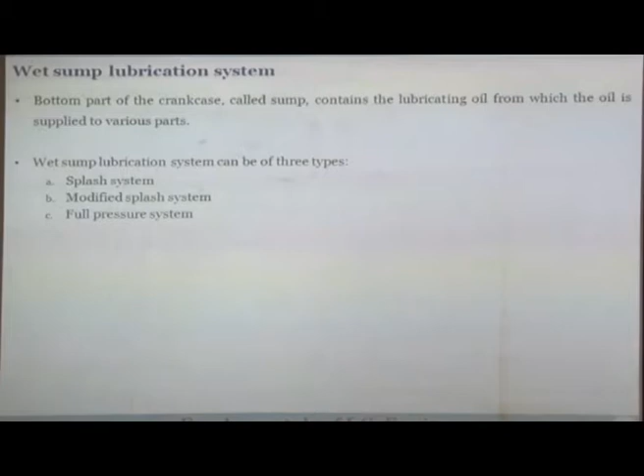This is one of the most popular systems, particularly for cars, buses, and trucks. This is the wet sump system, which is very popular. One type is called the splash lubrication system.

So here you see this is the camshaft, this is the connecting rod. On one side this is the crankshaft, and this is the connecting rod, and here you have the piston. There will be another set of connecting rod and piston at two other places. Only one piston is shown here.

So here you have the sump, the bottom part of the crankcase, which is filled with lubricating oil. There will be a strainer. What is its function? One of the important functions of lubricating oil is to remove whatever debris or soot is generated, cleaning it up and depositing it here.

If you have debris here, you do not want it recirculated, because once recirculated, it will come between the interface of mating surfaces. A small wear debris between two mating surfaces will increase the wear. So this is extremely challenging - you remove the debris so only clean oil goes through, and this is the oil pump.

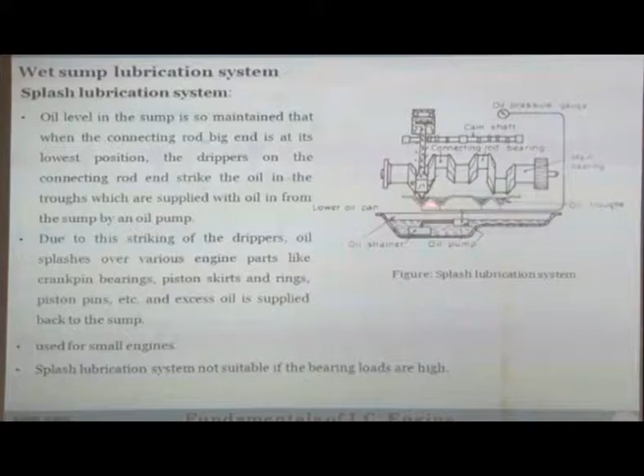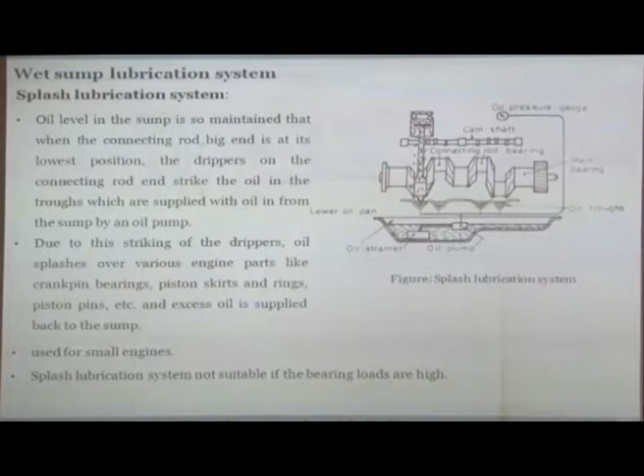It creates the pressure, and then there is an oil trough. The oil trough is like a small tank which is just below the crankshaft. If you look at this connecting rod, below it there is some kind of geometry.

It's like a finger. So when the crankshaft comes, this dips into the trough and throws the oil up onto the liner walls, and that's how lubrication happens. The oil level in the sump is maintained so that when the connecting rod big end - this is the big end, this is the small end of the connecting rod -

when the connecting rod big end is at its lowest position, the dipper in the connecting rod end strikes the oil in the trough, which is supplied with oil from the sump. This pump is supplying all these troughs, so they are always full since they're fed by the pump, and when the dipper comes, it splashes and lubricates the walls.

Once it splashes, the oil is removed from the trough and made up again by the pump. Due to the striking of the dipper, oil splashes over various engine parts such as crank pin bearings, piston skirt, rings, piston pins, etc., and the excess oil is supplied back to the sump. It lubricates everything, and whatever is excess drips back to the sump. It's a very dynamic situation.

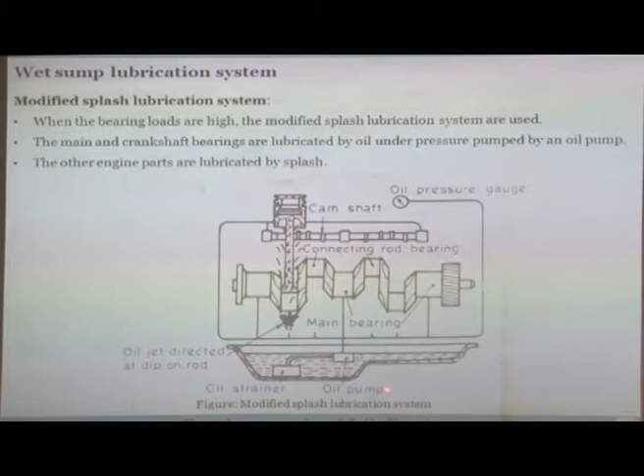Then the third system is the full pressure lubrication system. What is this full pressure lubrication system? In this, an oil pump is used to lubricate all parts of the engine. Here it is only the bearings, but here the oil pump is lubricating all the parts.

Drilled passages are used to lubricate connecting rod bearings. So now you have drilled passages. Oil is coming here, and from there a drilled passage is lubricating the connecting rod big end bearing. From here there is another passage, and then through the connecting rod there is a passage which is lubricating here. All these bearings are lubricated by passages.

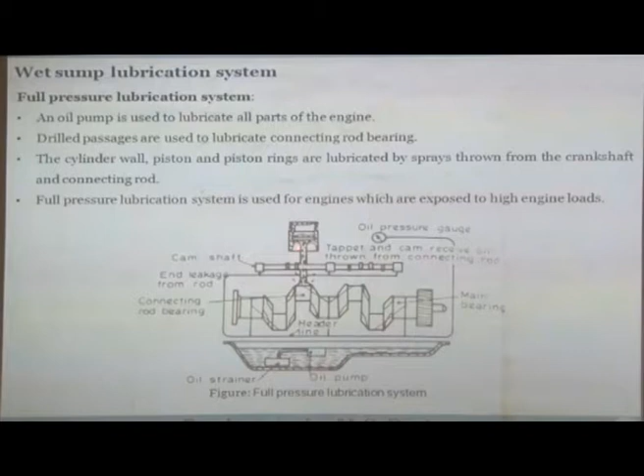So basically in various components you have drilled very fine holes which carry high pressure oil under dynamic conditions to various parts. The cylinder wall, piston and piston rings are lubricated by spray thrown from the crankshaft and connecting rod. So in the crankshaft and connecting rod there are various holes which throw the spray up.

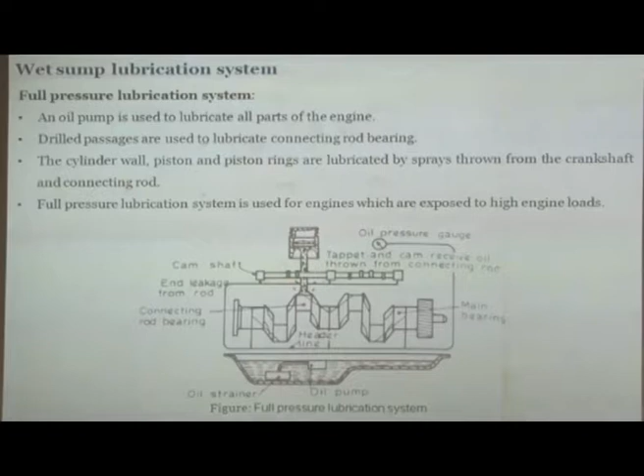Full pressure lubrication system is used for engines which are exposed to high engine loads. So all the high performance engines which experience very high loads, which are expected to operate at high loads most of the time, they use a full lubrication system. Most of the automotive engines actually use this kind of system.

So this is as far as the lubrication systems are concerned.

Functions of the lubricating system. What does a lubricating oil system do? It does a few things. So one of the first responsibilities of the lubrication oil system is to lubricate.

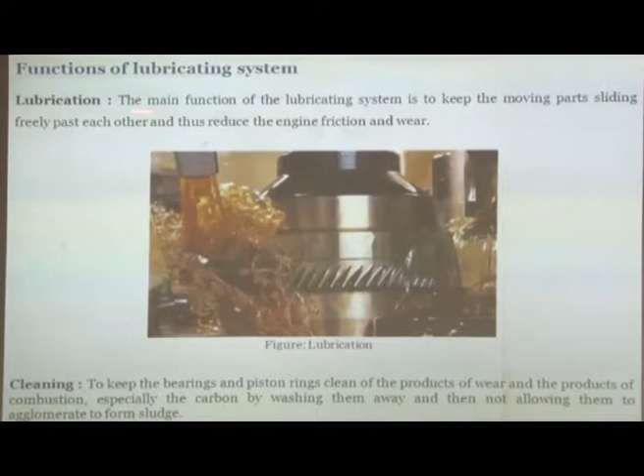But lubricate is not the only duty that it has to perform. Lubricate is one of the main duties, but it is not the only one. There are others. So the main function of the lubricating system is to keep all the moving parts sliding freely past each other with low friction and reduce engine friction and wear. So the first function of the lubrication system is to lubricate effectively.

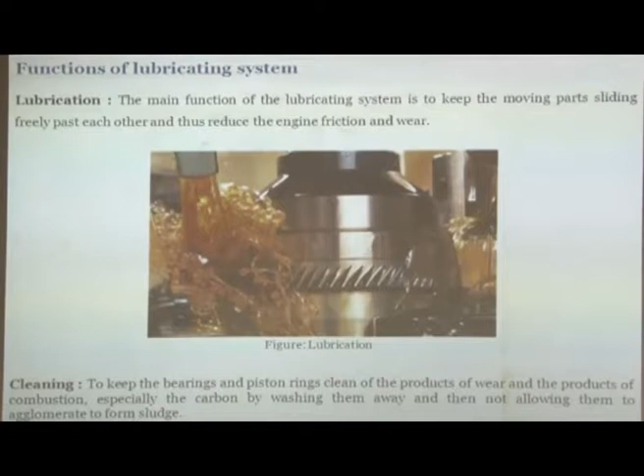The second function of the lubricating oil system is to clean. Because the engine has combustion, and in the combustion process you generate a lot of soot, deposits, and lacquers and all kinds of things which, if you don't clean, will build up. So one of the important functions of the lubricating oil is to remove those deposits, because deposits on any surface are undesirable. For example, if there is a surface used for heat exchange and you have deposits on it, what will happen? It will reduce the heat transfer, and the device will not work effectively.

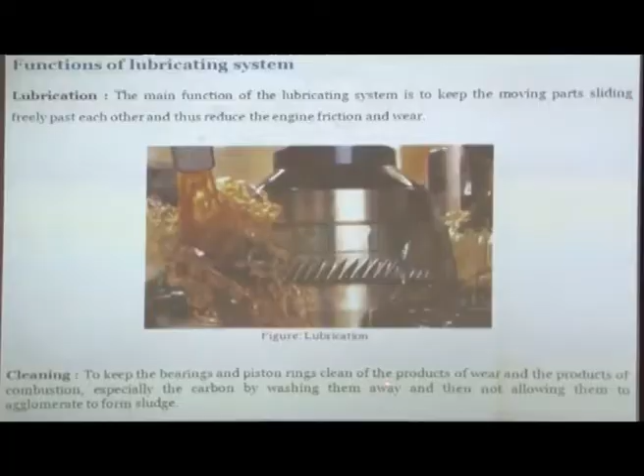So to keep the bearings and piston rings clean of the products of wear and the products of combustion, especially carbon, by washing them away and not allowing them to agglomerate to form sludge. So one of the functions is to remove them.

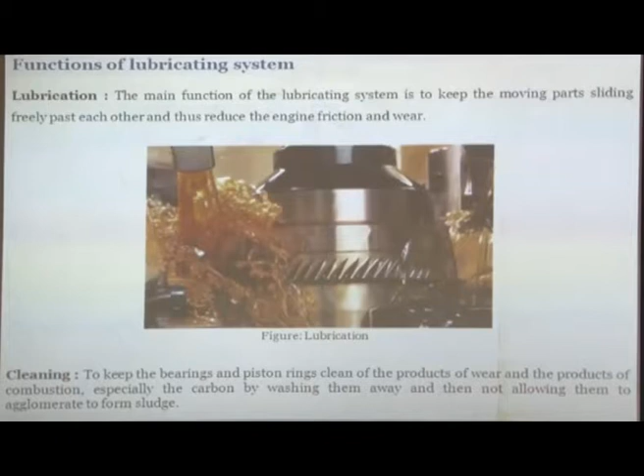For example, you must have seen the piston ring. Where is it located? In the groove, and there is not much space in the groove. There is mobility, and you want that mobility in order to have a dynamic seal. If deposit takes place and that groove becomes smaller, what will happen? Your piston ring will get stuck in the groove. It will lose its mobility, and if it loses its mobility, it will not be able to seal properly. So the bottom chamber will not be sealed against the top chamber. As a result, the blow-by will increase. Then a lot of wrong things will start happening.

So one important function is that you remove the deposits wherever they are forming. But then another important function is that all those deposits, when they come to the crankcase, should not agglomerate and form groups, because if they agglomerate and form groups, they will form clusters, and clusters are not good. So they should remain suspended in peptized form.

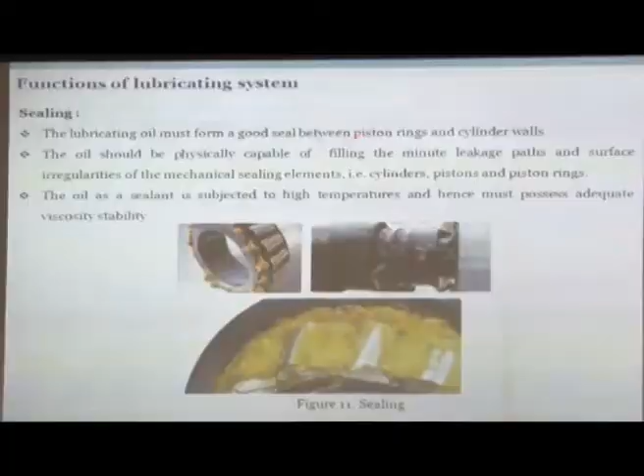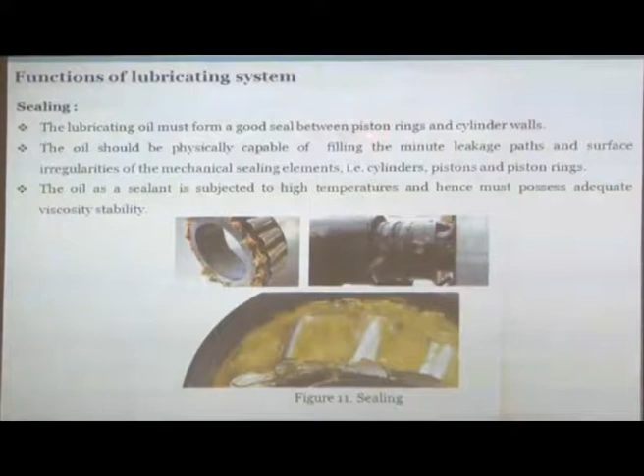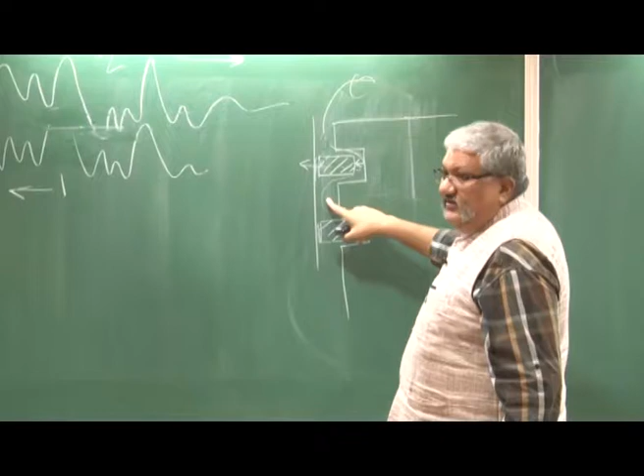Another very important function is sealing. Lubricant oil must form a good seal between the piston ring and the cylinder wall. The cylinder surface and the piston ring surface both have minute irregularities. If you have to prevent gas pressure from leaking from one chamber to the other, this gap has to be filled, and it is filled by lubricating oil. So it seals and prevents the leakage of pressure from the top chamber to the bottom chamber. This is one of the very important aspects of lubricating oil, which should be able to form a good seal between the piston rings and the cylinder wall.

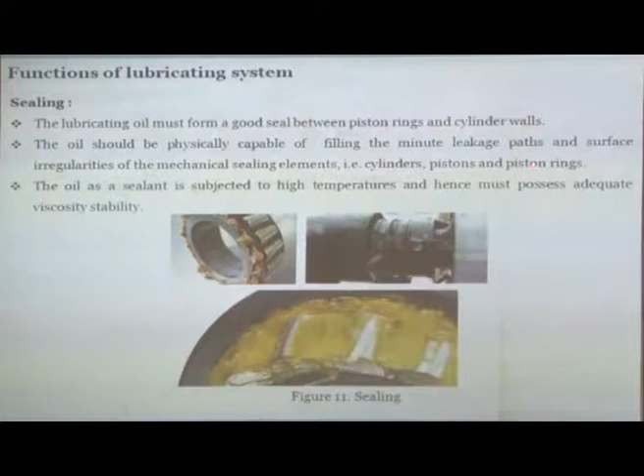The oil should be physically capable of filling the minute leakage paths and surface irregularities of the mechanical sealing components such as cylinders, pistons and piston rings.

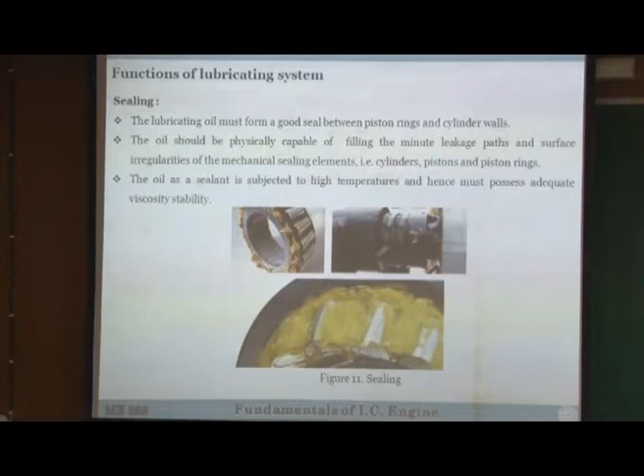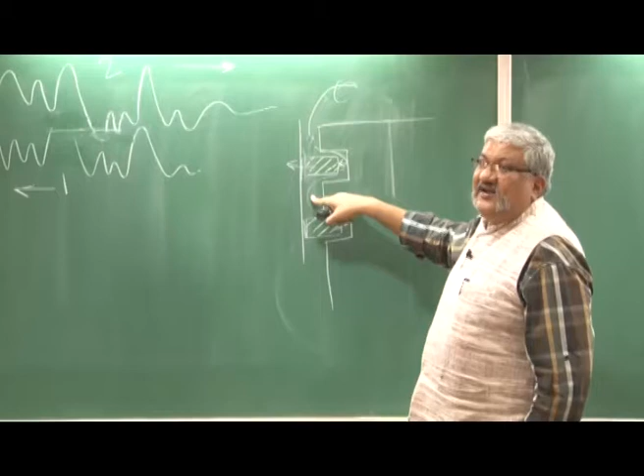The oil used as a sealant is subject to high temperatures, so it must possess adequate viscosity stability even under high temperature conditions. Now here comes a twist, because any oil, when heated, will lose viscosity. But for this sealing function to be performed, the oil must protect against leakage even in high temperature conditions, which means it must maintain its viscosity even at high temperature. This is counterproductive or counterintuitive — an oil that naturally loses viscosity with increased temperature is now expected to maintain its viscosity even as temperature rises.

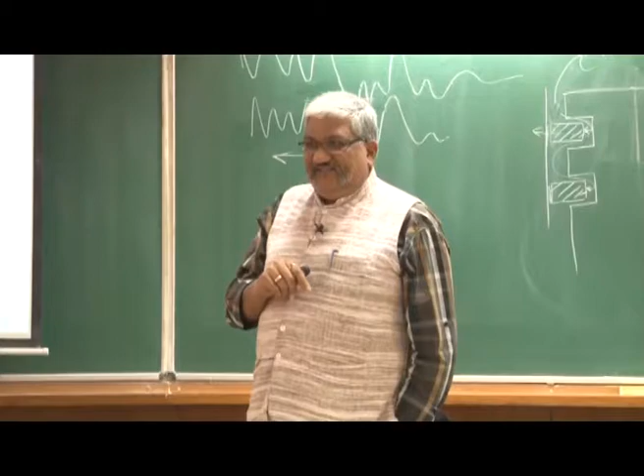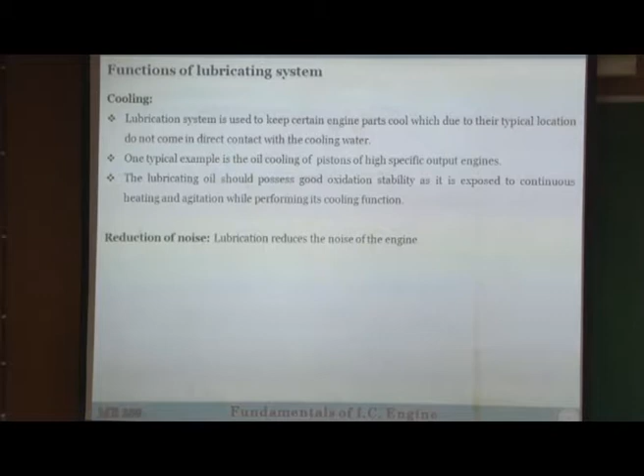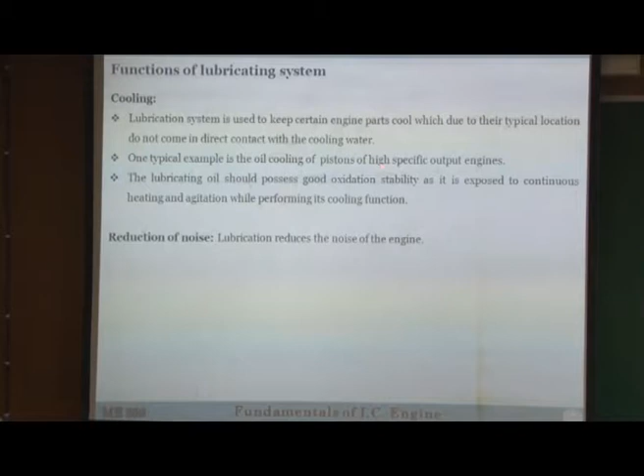Believe it or not, lubricating oil is also used for cooling. In high performance engines, the piston becomes one of the weakest parts which need to be cooled, and you cannot have water jackets or air cooling there. The only fluid you can use for cooling the piston is lubricating oil. So the lubrication system keeps certain engine parts cool which, due to their typical location, do not come in direct contact with cooling water. One typical example is oil cooling of the piston in high specific output engines.

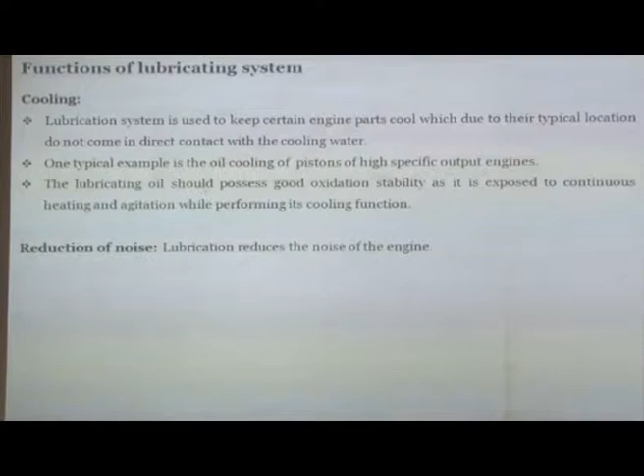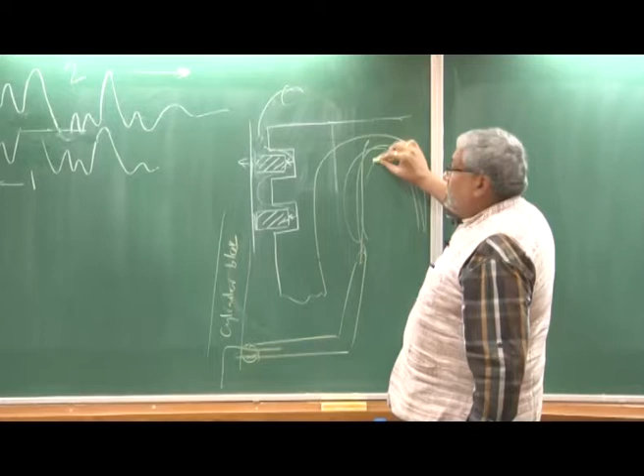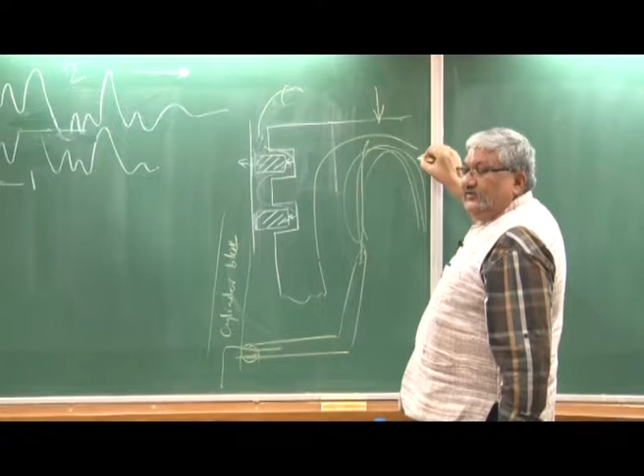So suppose this is the piston, and this is the cylinder block. On the cylinder block, through some mechanism, there is an oil gallery, and from that gallery high pressure oil comes through a nozzle. This nozzle sprays oil all over the internal surface of the piston to cool it, so the heat convected from the gases to the piston and conducted through it is convected back into the lubricating oil. This oil then goes to an oil cooler where it is finally transferred to the cooling water.

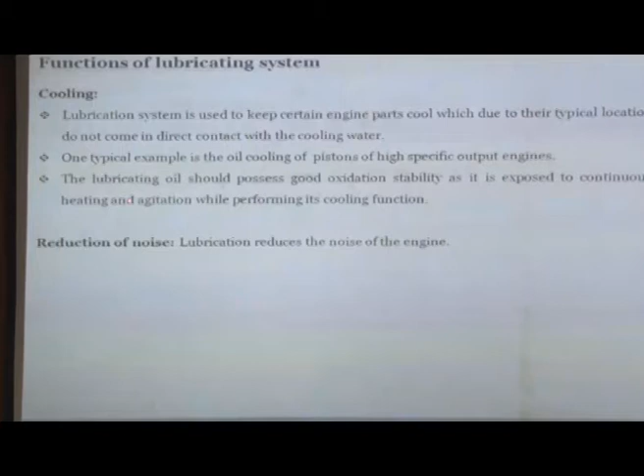So the lubricating oil should possess good oxidation stability as it is exposed to continuous heating and agitation while performing its cooling function. Another function is reduction of noise — lubricating oil should also reduce noise a little bit.

So these are some of the very, very demanding expectations from lubricating oil. Now let us try to understand what lubricating oil is and how we make it.

Recall that during refining of petroleum products, there is a fractional distillation column, where first a lot of lighter products come out, then petrol, diesel, and finally lubricating oil. Lubricating oil basically contains two things: the base stock, which comes out of the refining process, and additives, which are mixed in to make the final lubricating oil. Base stock is typically 70-80%, sometimes 90-95%, of the lubricating oil, while additives make up the remaining 5% to 20-30%, depending on the application.

Base stock is basically the main bulk of the material that acts as a lubricant. Now base stock does not have all the properties that you expect from a lubricating oil. We have listed a whole lot of expectations - it should be able to clean the surfaces, keep all the deposits peptized, and you should have good cooling efficiency. All those things, it should be stable for a very long time.

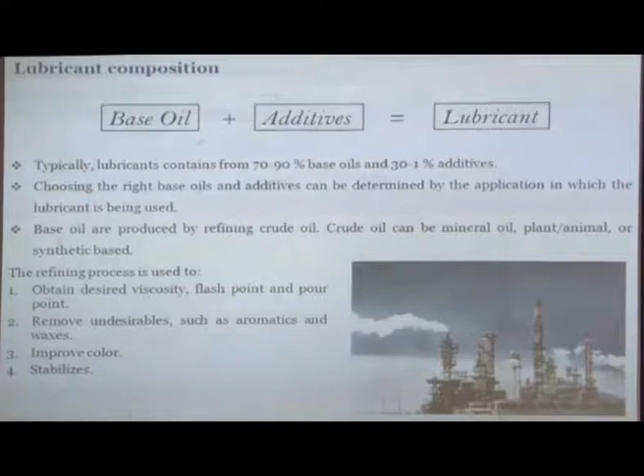So depending on the application, you want a certain type of properties. That's where you take a base stock of the desired properties and put certain other types of additives into it to have your desired properties for that particular application. So choosing the right base oil and additives can be determined by application, and it varies from application to application.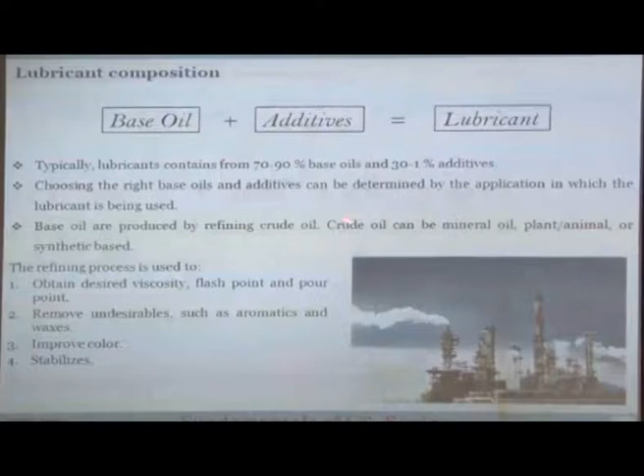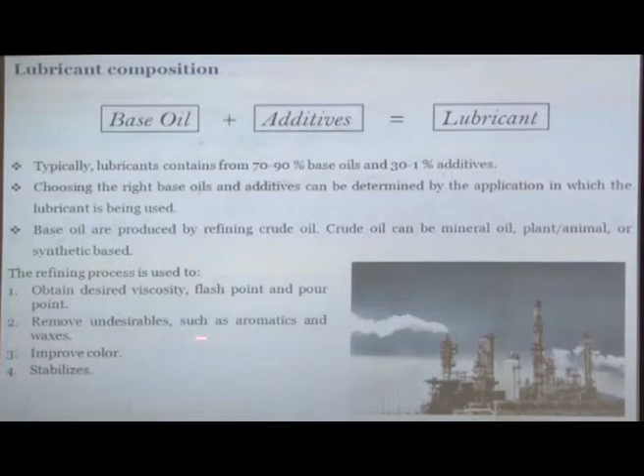Base oils are produced by refining of the crude oil. Crude oil can be mineral type, crude oil could be plant or animal based, or synthetic based. In the refining process, you obtain the desired viscosity, flash point and pour point of your base stock. You remove the undesirable products such as waxes and aromatics, you improve the color, and you stabilize.

Stabilizers means, if there are any double bonds or triple bonds present, then the oil will be unstable, because double and triple bonds means there is an appetite for hydrogen. Those bonds will break quickly and join with another hydrocarbon which is also having appetite, forming larger molecules, and when you have larger molecules, you will change your properties - your viscosity will increase. So you stabilize them by removing the unsaturation.

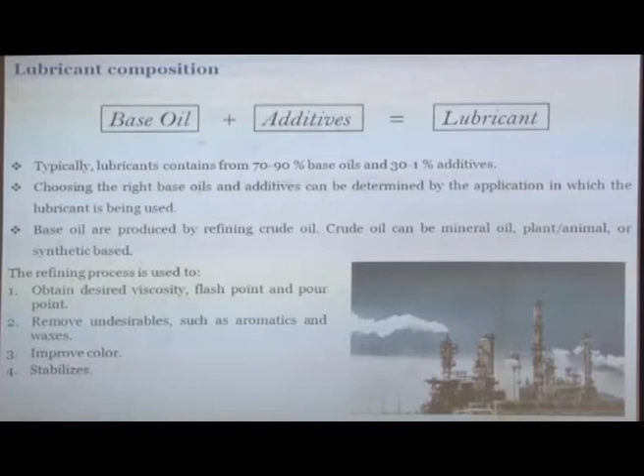Now if you look at the other properties, viscosity, as I said, is one of the most important properties. Viscosity of an oil is a measure of its resistance to flow, and it is usually measured in terms of - there are many units, but this is Saybolt Universal Seconds, SUS, which is the time required in seconds for a given quantity of oil to flow through a capillary tube under a specified condition. So there is a capillary tube, and you take a certain quantity, and whatever time it takes for flowing through that capillary, that will be used for calculating the Saybolt Universal Second.

Viscosity is normally expressed at two temperatures, minus 18 degrees C and 99 degrees C. Generally for fuel purposes, we say 40 degree and 100 degree is what is more accepted, but then you can choose your own temperature and compare.

Viscosity is also expressed as centi-Stokes, centipoise, redwood second. So there are many scales depending on the type of apparatus you have and the procedure that you are following for the determination of the viscosity. Centi-Stokes is a unit of kinematic viscosity, while centipoise is for absolute viscosity as determined by cold cranking simulator. Anyway, that is not very important.

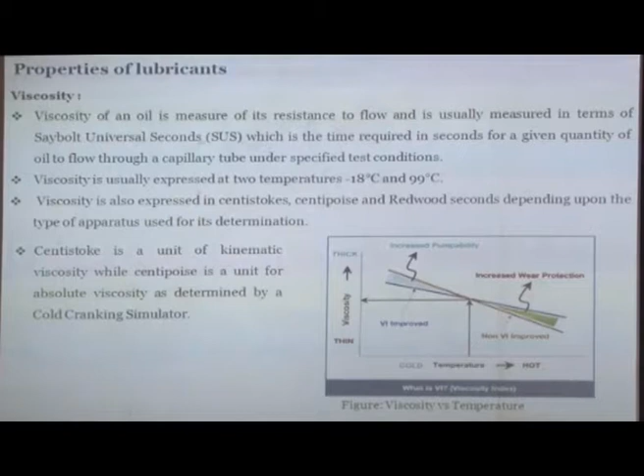You basically put some chemicals, additives into the oil which are called viscosity index improvers. Simply put, these are molecules which are temperature sensitive, so their physical size, when you heat them, increases. Imagine a spring which is closed, and when you heat it, it expands. So expands means the viscosity will increase.

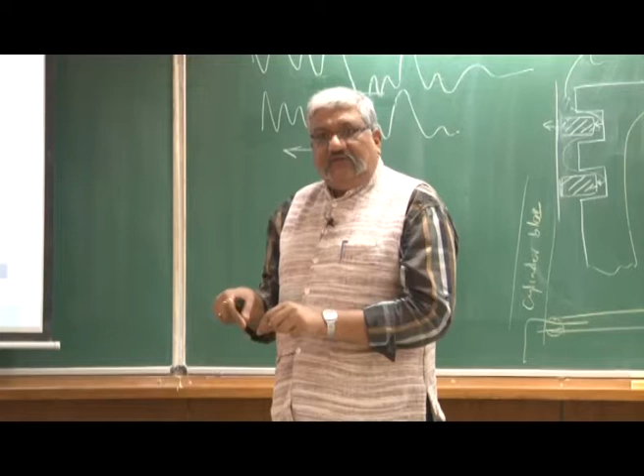So you have base oil where the viscosity is going down, and you have additive added to it which increases its viscosity. So the overall effect of increase in temperature will now be lower reduction in viscosity. If you don't put anything, then this is the line, and if you have put VI, viscosity index improver, the viscosity will not reduce by a great degree. So this is the VI improved.

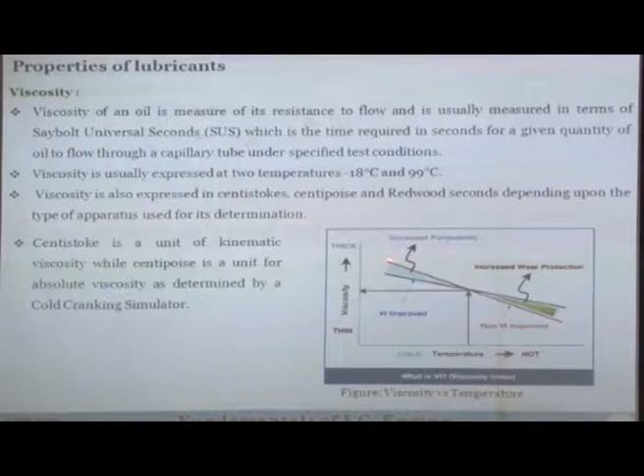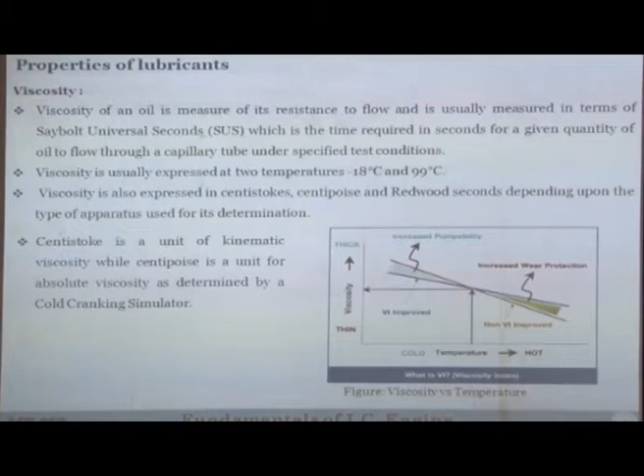Now here you see this is increased pumpability. That means if you are putting viscosity index improver, the pumping losses will reduce because initially your viscosity has come down, and here the wear protection will be more by putting the viscosity index improver. So both in low temperature range and high temperature range, by putting viscosity index improvers you will get benefited.

So viscosity index: the viscosity of an oil is substantially affected by its temperature. Higher the temperature, lower will be the viscosity. The variation in viscosity of an oil with change in temperature is measured by the viscosity index. A high viscosity index number indicates relatively smaller changes in viscosity when the temperature goes up, and vice versa. To improve the viscosity index of an oil, certain compounds called VI improver or viscosity index improver are added to the base stock.

So this is all about the viscosity index. Now, cloud point and pour point. What is cloud point? Cloud point temperature refers to the temperature below which the wax in the lubricating oil forms a cloudy appearance. Lubricating oil is a mixture of several hydrocarbons, so when you start reducing the temperature, at a certain point some of those heavier hydrocarbons will start crystallizing and forming wax. That temperature is called cloud point.

When the clouding of the fluid changes from crystal clear to cloudy, that's when the wax formation takes place. The presence of semi-solidified waxes thickens the oil and clogs the fuel filter - this is not applicable to injectors in the engine, this is for diesel. So basically it is going to thicken the oil.

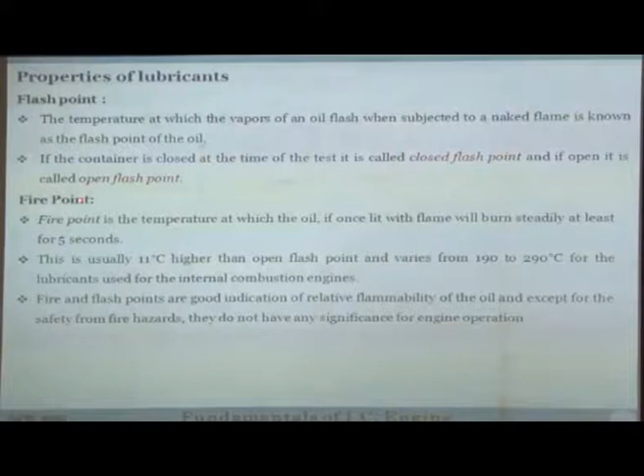These are different ways of measuring the flash point temperature. Flash point is when you show the flame and it will just flash once and get extinguished. If it has continuous flames, that's called fire point because it has caught fire. The fire point is the temperature at which the oil, if once lit by flames, will burn steadily for at least 5 seconds.

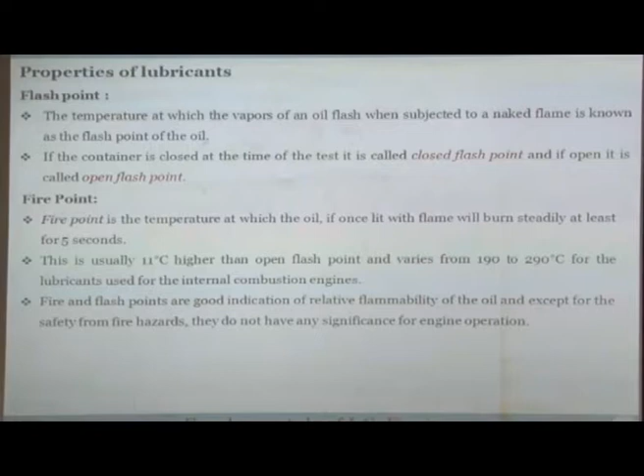This is usually about 11 degrees higher than the open flash point and varies from 190 to 290 degrees centigrade for lubricating oils used in IC engines. Under no conditions should your oil reach this temperature, because if that happens, the whole engine will get inflamed.

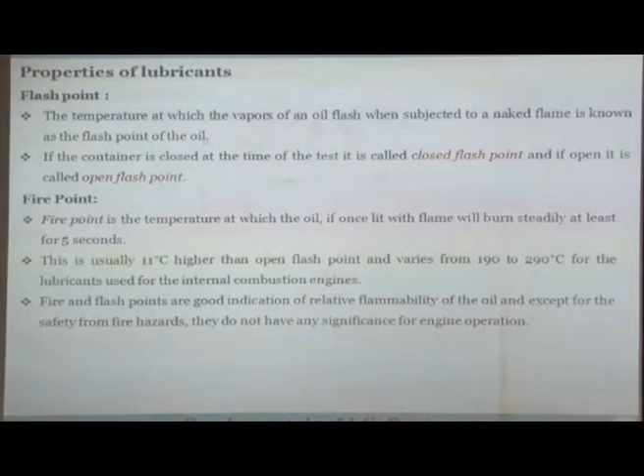Fire and flash points are good indicators of relative flammability of the lubricating oil, and except for safety from hazard, they do not have any other significance for engine operation. So fire and flash points are more safety parameters, and pour and cloud points are more from the cold climate working condition point of view.

They are important. Specific gravity of the oil varies from 0.85 to 0.96. This is not very important except as an indicator of weight and volume, so it's not really very important.

Carbon residue is the quantity of known mass sample of the oil which, on evaporation under specific conditions, remains carbonaceous. So you burn a certain quantity and whatever is left as a cake, that's the carbon residue.

Oiliness is a property of the oil to cling on the metal surface. In wintertime, you take oil, rub it on your skin, and figure out how good the oil is by how smooth your skin becomes. That's the oiliness of the oil. If the oiliness is good, it will stick to your skin and provide smoothness. The same applies to the engine.

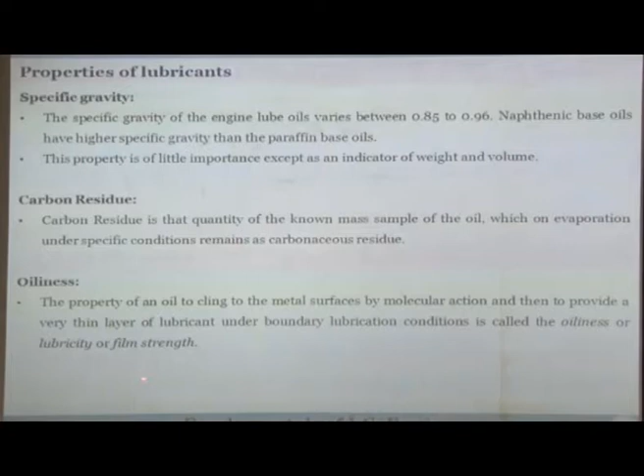The property of the oil to cling on the metal surface by molecular action and provide a very thin layer of lubrication under boundary lubrication conditions is called oiliness, or lubricity, or film strength. This should form a very thin layer and reduce friction.

Oxidation stability is also important. What is oxidation stability? Resistance to oxidation. Why is it important? Due to oxidation, oil will form deposits on the piston ring and lose its lubrication properties. So you should always have good oxidation stability.

The products of oxidation include carbon, lacquer, sludge, and organic acid, which can be corrosive to certain metals. You must have seen that whenever you open the engine, there is always a yellow kind of layer present on all the components exposed to lubricating oil. That is because of the oxidation of the lubricating oil.

Cleanliness, the absence of water and sediments, is an essential requirement of an oil. Water is not a lubricating fluid, it promotes corrosion, while dirt and small foreign particles of insoluble matter can cause great wear of the engine parts, and you don't want to have them.

Color has no practical significance except as an indication of how good or bad the oil is. If the color is dark, that means a lot of soot has gone in. If the color is light, that means it's still good, it doesn't have soot loading.

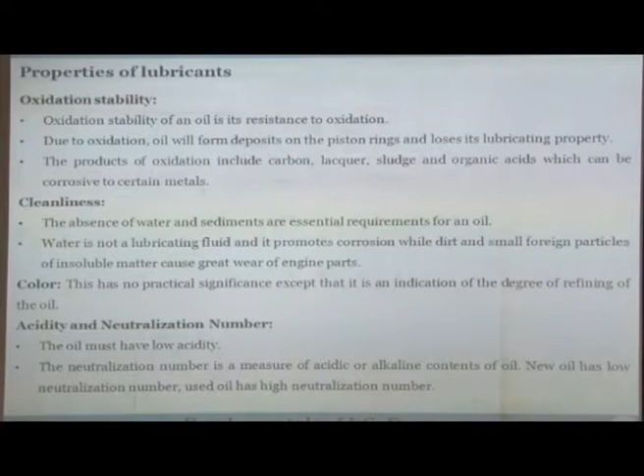Acidity and neutralization number: the oil must be basic, it should have low acidity. If it is exposed to more combustion gases, which are mostly acidic in nature, it should be basic in nature in order to protect the components. If it becomes more acidic, the components will wear out faster. The neutralization number is a measure of acid or alkaline content of the oil. New oil has a low neutralization number and used oil has a high neutralization number.

The lubricating oils are classified as per SAE. You must have seen SAE 10W40, 20W40 - this is just the classification of the oil, a method of assigning a number to different oils in universal use. So 10W40 oil in India and 10W40 oil in the US will have similar properties. They may be from different companies, but they have to meet a certain property table.

SAE assigns a number to the oil whose viscosity at a given temperature falls in a certain range. There are two temperatures used as reference, -18 and 99 degrees C. 5W, 10W, 20W - these three numbers are defined for viscosity at -18. -18 means they will be good at low temperatures.

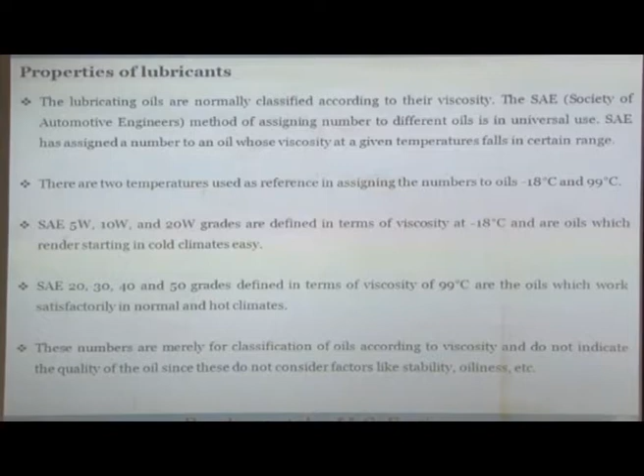These oils render starting possible in cold climatic conditions. So 5W, 10W and 20W are basically cold climate suitable lubricating oils. If it is SAE 20, 30, 40, 50 grades, there the viscosity is measured at 99 degrees, so they are not for cold climate conditions, they are for normal or hot environmental conditions. Whenever you see oil with a certain grade, you should be able to tell whether it is for cold climate, normal, or hot conditions. These numbers are merely used for classification of oil according to viscosity and do not indicate the quality of oil, since they do not consider factors like stability, oiliness, etc.

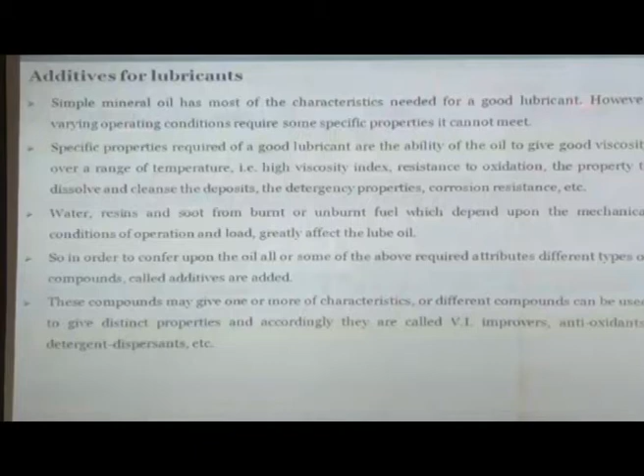Additives. Simple mineral oil has most of the characteristics needed for a good lubricant. However, under varying operating conditions, they require certain specific requirements which cannot be met by the base oil. For example, you want good viscosity over a wide range of temperature, high viscosity index, resistance to oil oxidation, property to dissolve and clean the deposit, detergency properties, corrosion resistance. All these properties do not exist in the base oil and they have to be given. So how are they given? They are given by additives that are added to it.

Water, resins and soot from burnt and unburnt fuel, which depends on the mechanical condition of operation and load, greatly affect the lubricating oil. When they get into the lubricating oil, they deteriorate its properties. So you want to put additives which can fight these as well. In order to confer upon the oil all or some of these attributes, different types of compounds are added which are called additives. These compounds may give one or more characteristics, or different compounds can be used for distinct properties, such as viscosity index improvers, antioxidants, detergents, dispersants. These are some of the additive names added to the lubricating oil base stock to give desired properties.

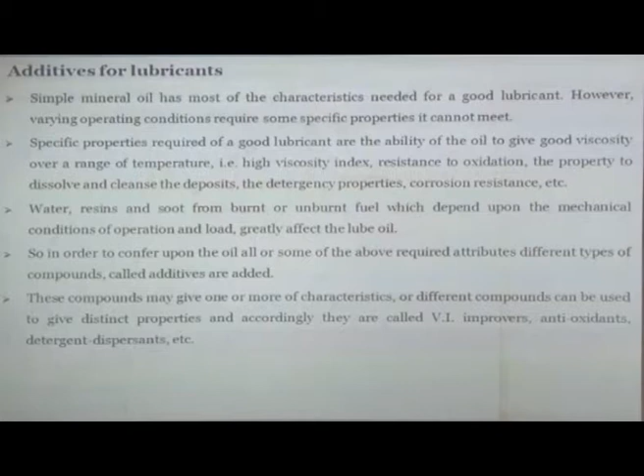This table basically lists all the additives. Detergents control high temperature deposits; if overbased, they can act as an effective acid neutralizer, so if acids are formed, they can fight the acids. Dispersants are used for control of low temperature sludge and varnish deposits. Anti-wear is for reducing wear, galling and seizure. Anti-rust reduces rust on different components by forming a protective layer. Viscosity index improver reduces the sensitivity of oil viscosity to temperature, maintaining viscosity even as temperature rises. Pour point depressant is used for reducing wax crystallization. Anti-foam agents are very important.

If something foams, what does that mean? It means all those bubbles will have a lot of oxygen, so all the fluid is now exposed to more oxygen, so oxidation will become more. So an anti-foam agent is nothing but a chemical which reduces the surface tension, so even if there is oxygen trapped, it will not form bubbles. The bubble will be collapsed because the surface tension is less.

Similarly, antioxidant reduces oil oxidation and protects alloys and bearings against corrosive attack. Oil contamination and sludge formation occur if you keep using the lubricating oil; they become unstable for further use because there will be a lot of oxidation products and sludge in it. Contamination of the lubricating oil occurs because of oxidation, dilution of the lubricating oil by fuel, by water vapor, formation of carbon, lead based compounds, wear metals may get added to it, and atmospheric dust and dirt can enter the system. All these contaminants, when mixed with oil, contribute to formation of sludge in an engine. This sludge can be black, brown or gray, it can be of any color.

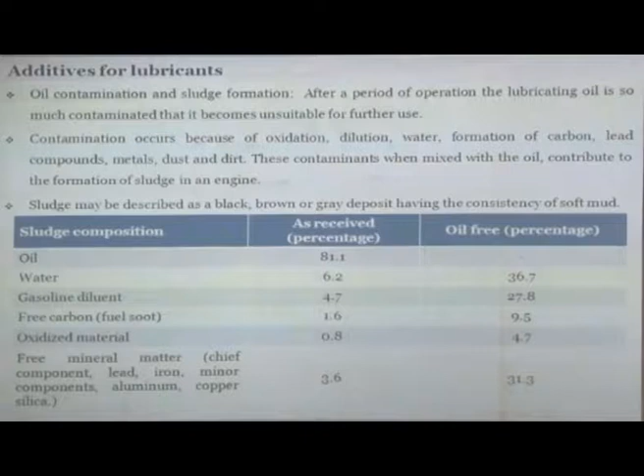This is a very complex subject, and this is one area which is still active, with a lot of research going on related to engine tribology and development of different types of high performance lubricating oil.

Nowadays the automotive industry is undergoing transformation. We expect a lot of power to be produced by a small size engine, which means thermal loading of the engine is increasing. More and more every component is exposed to higher and higher temperature, and in those conditions, maintaining good lubrication becomes extremely challenging.

First of all, let us understand why we require testing an engine. We require it so that we can have a device which is optimally designed, performs optimally, meets all the emission regulations, and its cost is still manageable - so to reduce the cost.

One of the other objectives is to improve the performance. You want to extract more and more power from a smaller and smaller engine. So how do you know how much power you are able to extract? That you can figure out only by testing the engine.

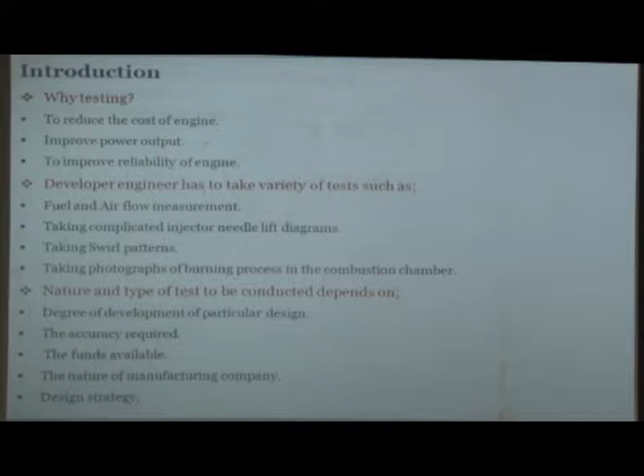When you test the engine, you also want it to not produce power just once, but keep on doing so for a fairly long period of life - so durability also needs to be tested. There are many types of testing.

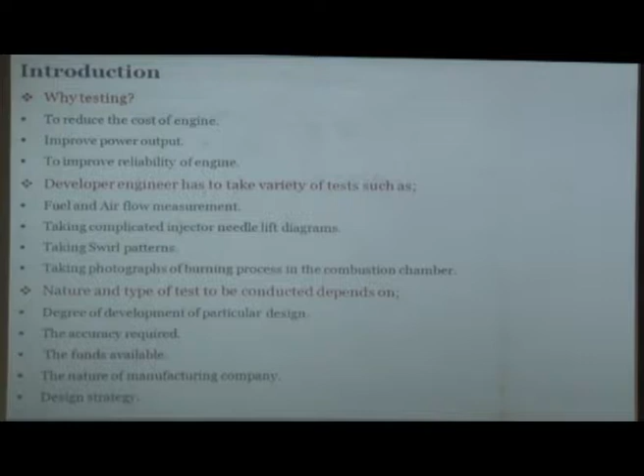For example, you might test the engine for performance, and that's a very small test. You might like to test the engine for emissions, that also is not a very long test. But when you are testing an engine for durability, you have to do an accelerated test for a prolonged period of time to see which components start failing first. So there are different types of testing with different requirements and different time frames.

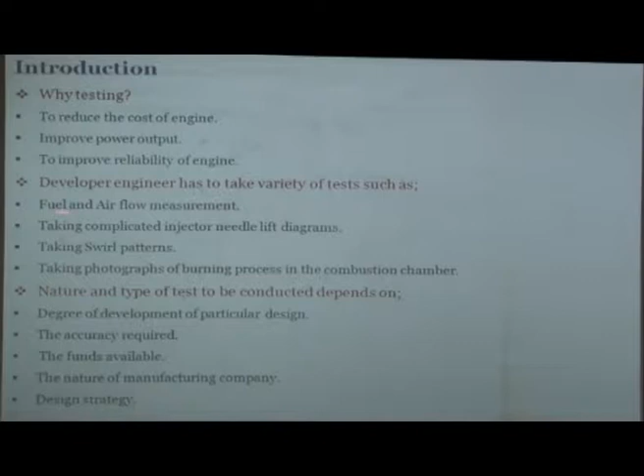The development engineer has to perform a variety of tests. For example, one of the foremost important tests is figuring out what is the specific fuel consumption and what is the air consumption. So one of the basic tests on the engine is fuel and airflow measurement, which we'll be discussing.

Then taking complicated needle lift diagrams - when the injector opens and closes, what should be the duration, what should be the rate of fuel injection in the combustion chamber. The designer is also interested in taking into account the swirl effects.

We have seen that in an engine, the fuel and air mix, and the air could have different types of motion inside the combustion chamber, because the air motion is largely responsible for the interaction of fuel with air, and in that way it affects the power output as well as the emissions generated from the engine. So you are also interested in looking at swirl, which requires optical technology - endoscopic technology or a complete optical engine where you can see the entire combustion chamber.

This is the frontier of combustion research, where you are interested in taking pictures of fast burning images or flames inside the combustion chamber, because you want to figure out which are the locations where soot is forming, which are the locations where air is not being utilized, and which are the locations where your fuel is not penetrating so you are not able to optimally utilize the air inside the combustion chamber.

Ultimately, whatever is happening in the engine - these first two methods are more on a metal engine where you just guess things, and the last two are more on the optical side where you are actually interested in visual evidence. For most development done in the industry, it's done using these first two points, and if you look at very detailed study of what is happening inside the combustion chamber, this is done using optical engines.

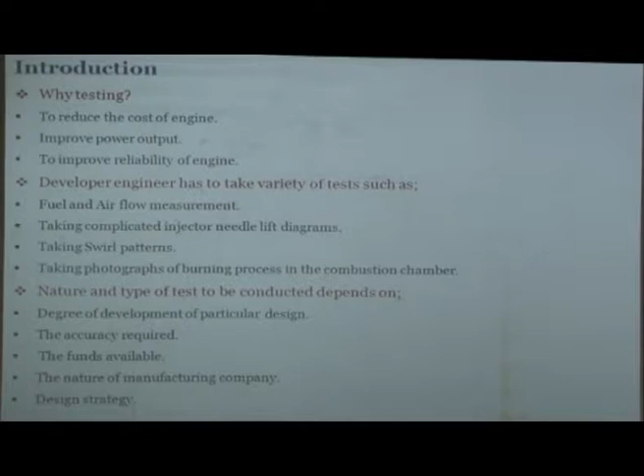And what is the accuracy that you require? For example, if you are having an engine test bed in an R&D center, there you require extremely high accuracy. But if you have an engine setup at the end of the assembly line where you just have to pass or fail the engine, there you don't need that kind of high accuracy. So depending on what accuracy is required and where it is going to be used, the accuracy required will be decided.

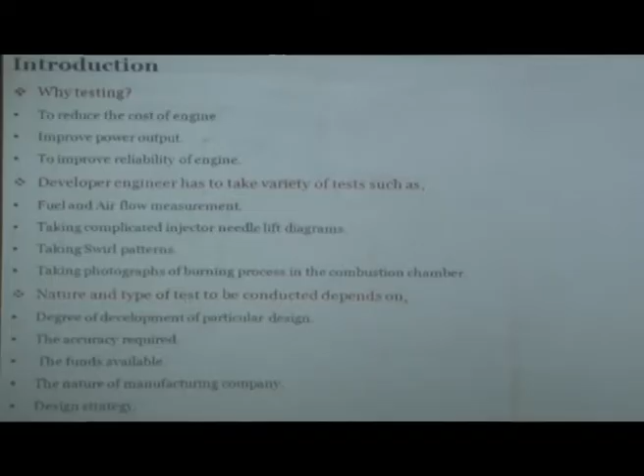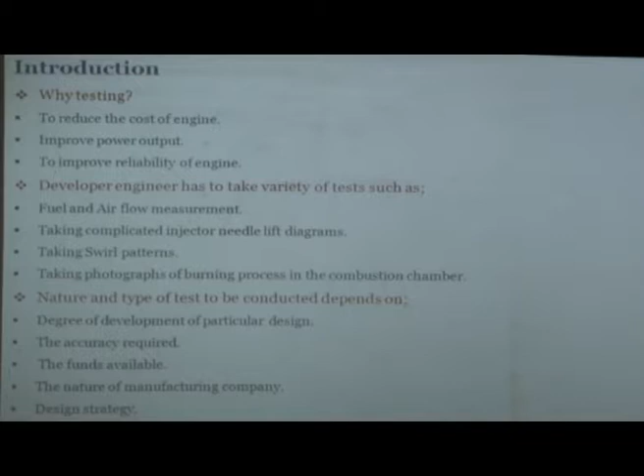And obviously, as you try to put in more and more accurate experimental facilities or infrastructure, it becomes more and more money intensive and expensive as well. Everything is governed by how much money is available, how much funds are available, and what is the nature of the manufacturing company. Whether you are interested in making a genset engine, which is not really a very sophisticated engine, or you are making an engine for a very high end comfortable car, for example Mercedes-Benz or Jaguar Land Rover. That also depends on what kind of testing you will be doing and what is your design strategy.

So in order to validate this, many tests are required to be done. The objective of testing of any engine is to understand the performance parameters in evaluation of IC engine performance, to evaluate the exhaust emissions and smoke that is coming out of the engine, particulates that are coming out of the engine. This of late has become, in the last decade or so, a showstopper.

If you are not able to comply with emission regulations, you will not be able to sell your engine or vehicle. So now most of the development today is to control the emissions, whether gaseous emissions or particulate emissions, and now even particulate number counting has come into the picture. This is becoming more and more a driver for development of newer technology, and therefore newer types of testing protocols are being developed.

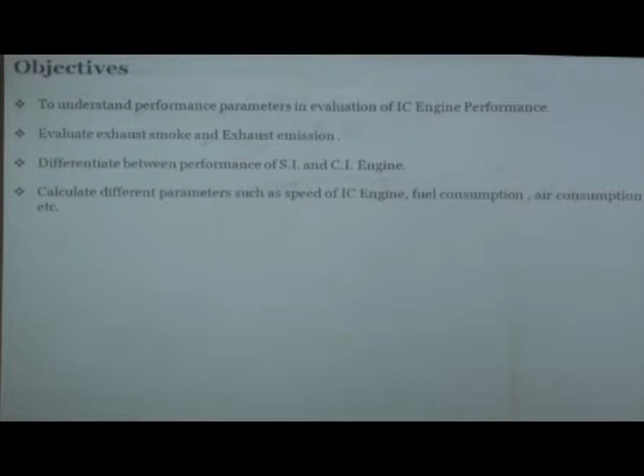And then if you want to differentiate between the performance of SI and CI engines, you need to do some tests. You calculate different parameters such as speed of the IC engine, fuel consumption, air consumption, and a whole lot of other things. This is not a very comprehensive list of objectives.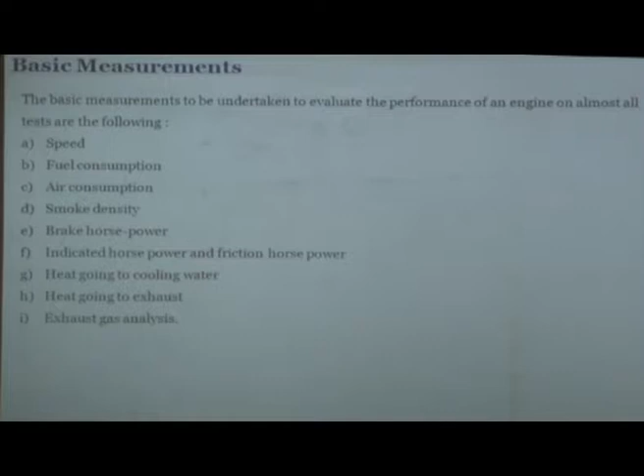So in this course, since this is a preliminary first level course on IC engines, the testing is rather limited. I'll be introducing you only to the basic testing protocols, and advanced testing such as optical diagnostics, etc. If you want to understand those, you have to take an advanced level course. Right now my focus will be to only look at basic testing.

So obviously, if we list the parameters that we want to test in the engine as basic testing parameters, this is not really a very comprehensive list, but most of the parameters are there. For example, you are interested in understanding what is the speed of the engine. You should know accurately at what speed your engine is operating. You should know what is the fuel consumption rate per hour, or per minute how much fuel is being consumed.

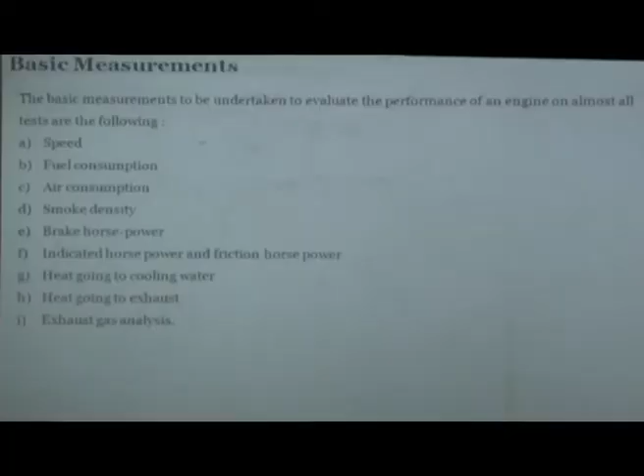You should also be interested in finding out what is the air consumption. You may ask me, sir, air is free, fuel is not, why do you want to measure air consumption? The answer is that for calculation of most of the parameters, you need to know the air to fuel ratio, which is an extremely important parameter that affects the performance, emission, and combustion in the engine. You need to know the air consumption rate, so you need to measure the air flow rate of an engine, and obviously you also have to measure smoke opacity and different exhaust gas emissions.

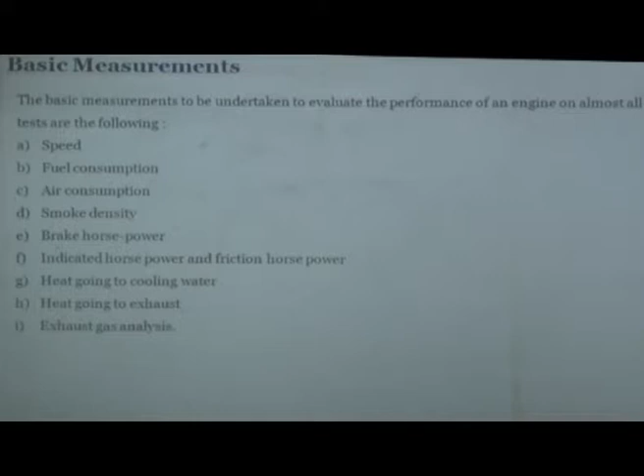When you say exhaust gas emissions, mainly you are talking about gaseous emissions such as carbon monoxide, carbon dioxide, hydrocarbons, and NOx. These are the 4 regulated gases, actually CO2 is not regulated, so 3 regulated gases plus 1 particulate matter.

So these are the 4 regulated emissions that you are interested in measuring, and smoke opacity is one parameter which gives you a qualitative estimate, not quantitative, of the particulate matter present in the exhaust, and it is a very simple test.

Therefore, in most preliminary studies, smoke opacity or smoke density, whatever you may like to call it, is actually measured. And then obviously you have to measure what power is being produced by the engine, because ultimately you are doing all this to generate some power, so you should know how much power is being generated.

When we discuss power, we know there are 3 types of power measurement. First is the indicated power measurement, where the gases are transferring power to the first interface of the mechanical linkage, that is the piston. Then from there, when it goes to the shaft, whatever is available at the shaft is called brake horsepower, and what is lost in between during the mechanical linkage is called frictional horsepower.

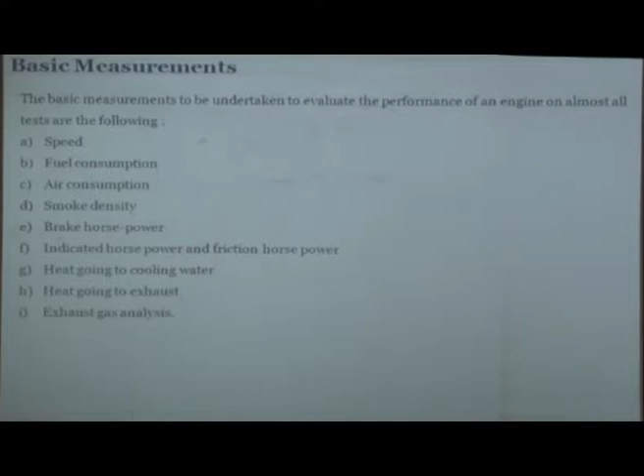And you are interested in measuring all 3 of them, because ultimately you want to reduce frictional horsepower as much as you can, you want to increase the BHP, and therefore you want to increase the IHP as well. So indicated horsepower, frictional horsepower and brake horsepower, these 3 measurements are also extremely important.

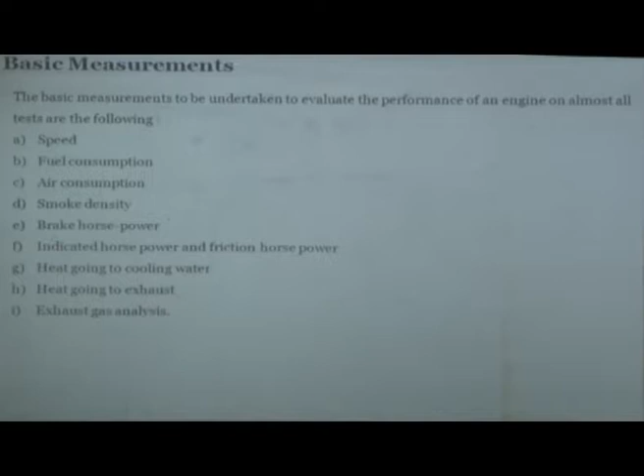And then, as mentioned in earlier lectures, we are also interested in figuring out the balance sheet: how much fuel we are putting in, where it is going, how much is being used for useful work generation, how much is going into cooling, how much is going into exhaust, and how much we are not able to account for.

So here you see, if you have measured the fuel flow rate, you know how much energy you are putting in, and you know how much useful work is being done in the form of BHP. You know how much heat is going into the cooling water, and how much heat is going into the exhaust, and the difference is friction and unaccounted losses, with frictional losses actually measured by frictional horsepower. So these are some of the basic parameters, at a very high level, that we are interested in measuring.

Now we will look at each one of them, how we actually measure them, and what is the working principle for these measurements. So first let us look at the measurement of speed. How do we measure the speed?

The best method of measuring speed is to count the number of revolutions of the shaft in a given time. If you can manually count, take a stopwatch, you can manually count the rotation of the shaft, you can do that, but unfortunately engines are pretty fast and manually counting is ruled out, you will not see anything. So you have to figure out some mechanism by which you can count it.

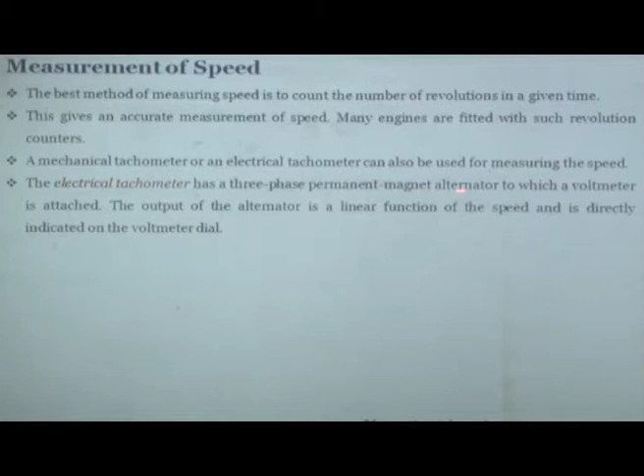An electrical tachometer has a 3-phase permanent magnet alternator. So what it is going to do, when it is rotating, it is going to generate a voltage signal. With this a voltmeter is attached, and the output of the alternator is a linear function of the speed.

So basically you just measure the output and convert it back into speed, and it's directly indicated on the voltmeter dial. So instead of looking at voltage, you just write RPM instead of voltage. You just change the numbers printed on the dial. That is electrical tachometer.

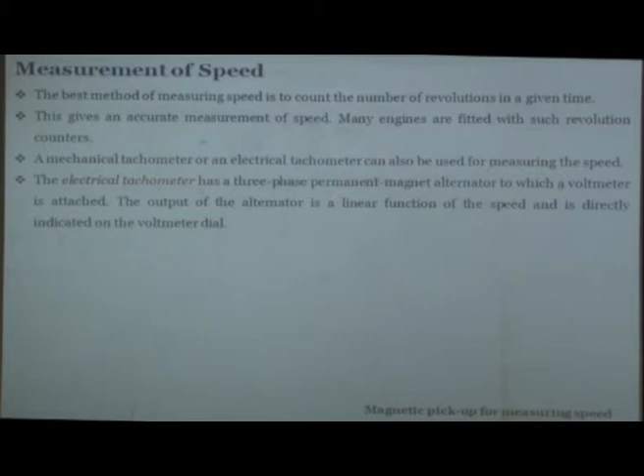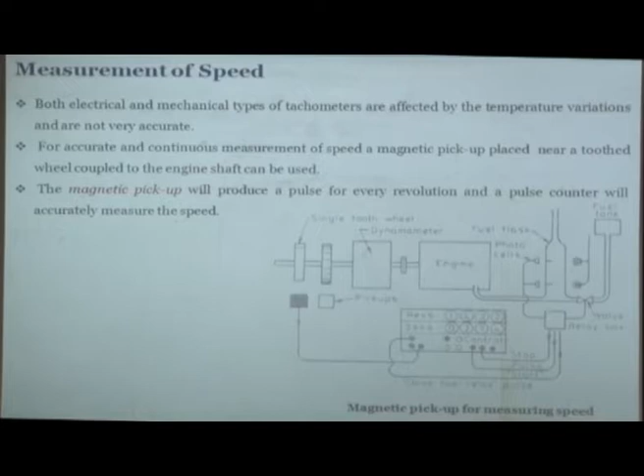Both mechanical and electrical type tachometers are affected by temperature variations and are not very accurate, because mechanical tachometers have a shaft with a small dimple where you attach it, and there is always a possibility of slip. If it slips, you get a faulty reading. Similar thing happens in the electrical tachometer also. A tachometer is something you physically attach to the shaft, and there could always be slip, leading to inaccurate measurement.

So for accurate and continuous measurement of speed, either you place a magnetic pickup or an optical pickup near a toothed gear attached to the shaft. The toothed gear has teeth, and whenever a tooth passes in front of the magnetic pickup, it generates a spike, and those spikes can be counted electronically. That way you can find out how many pulses are being generated, and knowing how many teeth you have, you can figure out the RPM of the shaft using an appropriate electronic circuit.

The other method, very popular and simple, used either on the shaft or flywheel, and quite common in our lab, is to stick a reflective white tape on the flywheel. So either we paint or put a highly reflective tape, and then put an optical device very close to it. This throws light onto the wheel, which is either black or blue. Once the black portion is there, it won't pick up anything, but once the white portion comes in front of it, the light is reflected and picked up, converted into a spike, and those spikes are counted. It's a very accurate method with no possibility of slippage. As long as you have a clean white surface reflecting light, you'll have good measurement.

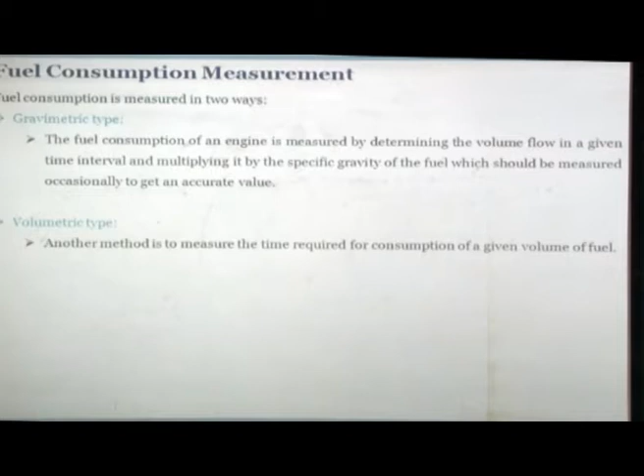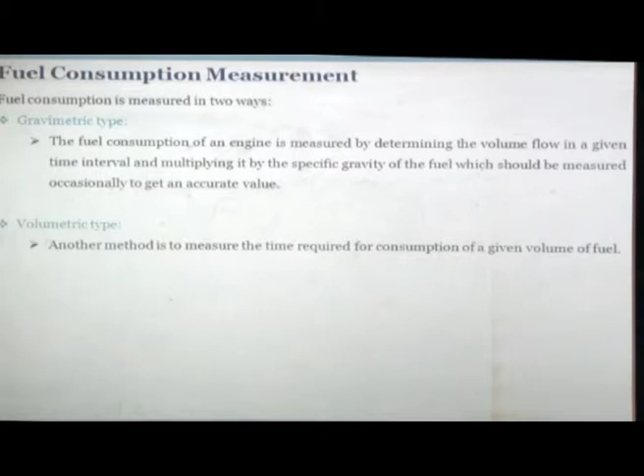The second measurement that is important after speed is fuel consumption measurement. Now, when we want to measure the fuel, fuel is liquid most of the time. When we talk about SI and CI engine fuel, in the context of IC engines, we normally talk about liquid fuels only. Gaseous fuels we use, but we treat them as a special case with separate measurement, because you have to measure the gas flow. So right now we assume the fuel is liquid.

We know that liquid fuel density changes with temperature. Suppose today the temperature is 20 degrees at this point in time, and at night it may be 5 degrees. Do you think the density of the fuel is going to be the same? It's going to change, maybe by only a couple of percent, but that couple of percent will introduce inaccuracy into your result. Second thing is, if you measure the calorific value, what is its unit?

Unit of calorific value is megajoules per kilogram of fuel, not per liter of fuel. So if you want to measure the fuel flow rate, what is the easiest way? It's the volumetric fuel consumption. Just put a burette, take a stopwatch, and see in 20 seconds how much fuel is consumed. You can read the readings, multiply the volume by density of the fuel, and figure out the fuel flow rate. This is called volumetric fuel flow measurement, but it will be inaccurate because you are not measuring the temperature and are just taking one density.

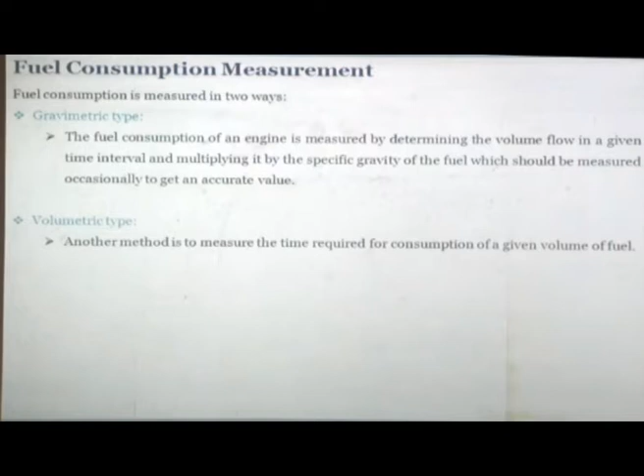Now, as I said, there could be many measurement errors apart from just the temperature. For example, due to engine heat, the tank and pipe etc. are very close to the engine, and the engine gets heated up. If you run the engine for 10, 15, 20 minutes, everything gets heated up. So even the fuel line gets heated up, and when the fuel line gets heated up, there will be some bubble formation. Why will there be bubble formation?

Because the fuel is made of different hydrocarbons. There could be some hydrocarbons which have low boiling point, and if that kind of temperature is available from the heat of the engine, it could form bubbles. So there could be heat vapor bubbles formed in the fuel line, and when these bubbles grow, the fuel volume increases because they have a high volume, and backflow of the fuel can also take place. If you are doing volumetric measurement, bubbles will not have much mass of the fuel, but they will count towards volume, so that will lead to inaccuracy.

Some fuel flow meters measure this backflow also. So if bubbles are formed before or inside the flow meter, then the indicated flow could be actually much higher than what it actually is. You will get a higher reading of consumption than the actual consumption, because more flow is being counted - it is shown by the indicator that more flow is taking place.